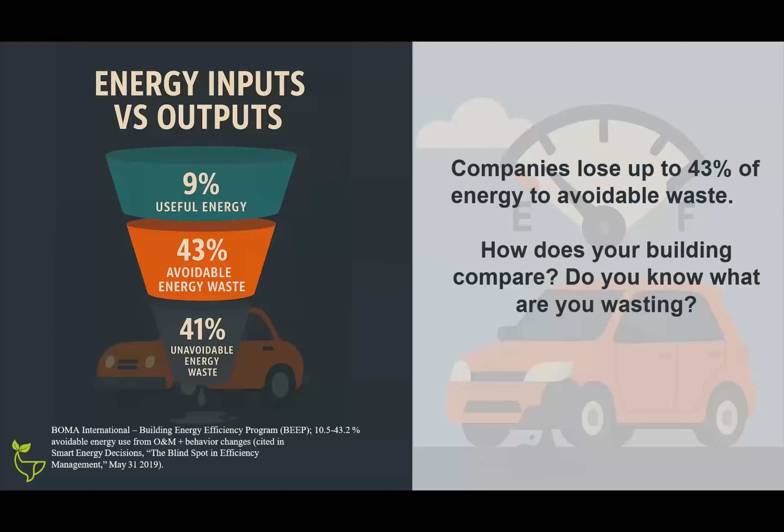So remember, we're out of gas. You find some kind soul that helps you get to a mechanic. Hopefully you're in good hands. But what does he say?

He says you need a bigger tank. Now that seems absurd, right? If you're leaking fuel, you probably have the leak, you need to address that. But the reality is a bigger tank could get you a little bit further down the road.

I knew a guy who would make regular trips to the valley and didn't want to stop for gas. So he literally had a 50-gallon tank added to his truck, so he never had to stop. I never knew what he did for the bathroom. I didn't want to know.

And this is kind of how some companies approach that idea. They're not looking at the leaks. Instead, they just try to add more generation, solar, wind, or upgrade their equipment. But if your tank's leaking, adding more fuel doesn't necessarily solve the problem, you're just leaking more. So even with a bigger tank, you're going to be disappointed in the long run.

This is what happens with some of those projects when they're not monitored. Solar projects since 2015 are delivering 7 to 13% less than financing models assumed. That equals a week of lost generation every single year.

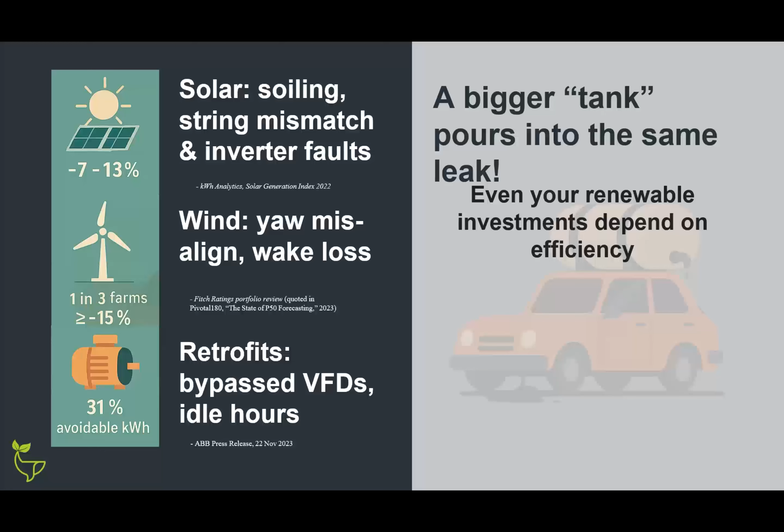So this is the principle driving our conversation today: energy efficiency is the first fuel, the only fuel that grows when you measure it. That's by Dr. Fatih Birol, executive director of the International Energy Agency. Their net zero pathway has 40% of the CO2 cuts just from efficiency.

That means no new hardware and no upgrades. If you want to read more about that, the QR code will take you to that net zero pathway. So if we look at it in comparison, the average cost to save a kilowatt is less than 3 cents. It's cheap, but people will gladly pay 4 to 6 cents for renewable energy.

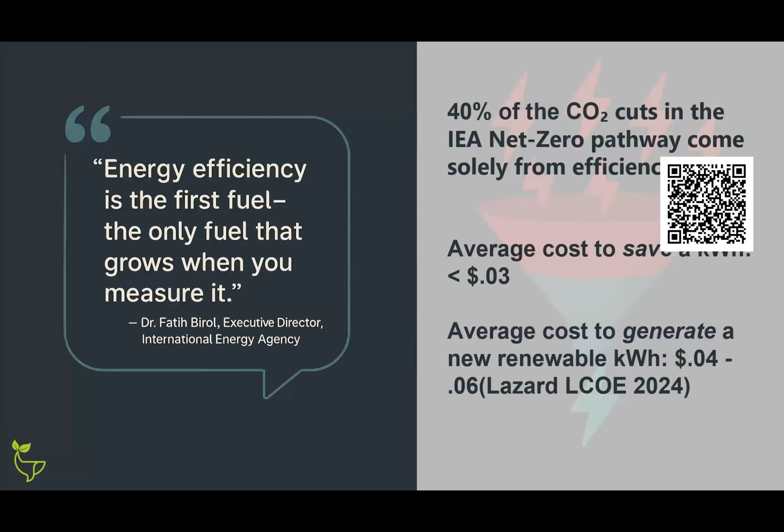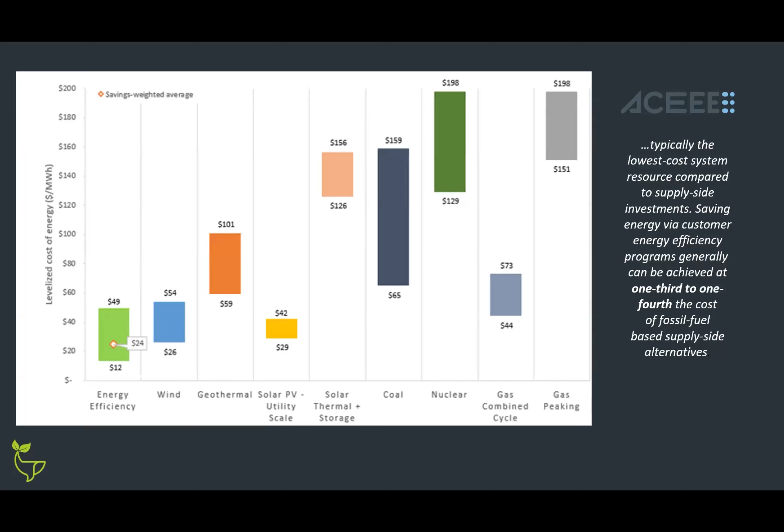So this is how it stacks up, energy efficiency side by side with those other systems. We can see energy efficiency is the cheapest, it's the fastest payback. So really we need to start thinking about it as the benchmark. All of these other things we can do are solid investments, but this is what every other investment should be measured against.

Every watt we rescue from the funnel is a watt we don't have to buy, burn, or finance. That's the first fuel we're talking about.

So we made the case: why should we produce more when we're wasting what we have? But sometimes in energy efficiency, they tackle it the complete opposite way. You may know somebody - we're going to save on energy, so we just don't use the resources that our operation needs because we're cutting back.

I found this comic because I thought it would resonate with the Texas audience, because we know any amount of time without AC is a nightmare. So we don't want to cut back. Energy efficiency is not about going without, okay? It's about using the energy we already pay for, but in a smarter way.

What got me on this thought was a county of Durham, a Wolsingham school in the UK, that had the idea of a Blue Nose Day. They sent a letter home to all the parents saying send your kids to school with sweaters, wool pants, mittens, and gloves, because we're not going to turn the boiler on - we want to reduce our carbon footprint and save energy.

But really, that's not the way to do it. We don't want to go without. We want the kids to put their sweaters away and enjoy. We want to raise the importance of being more sustainable, but in a responsible way. If you want to read that article, it's pretty funny - the QR code is right there.

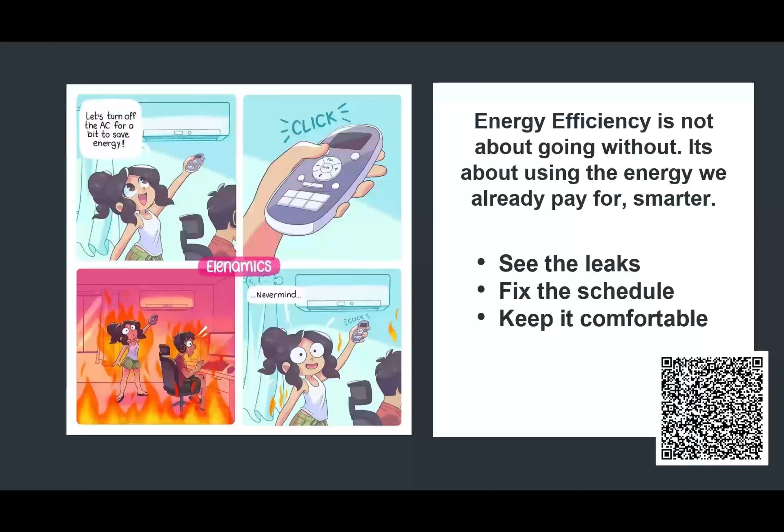So whenever an energy bill goes north, organizations can swing to those one or two extremes. But there's a smarter option right in the middle, and that's monitoring and optimization.

Here's a report by Siemens listing the top 10 energy saving options. If you notice, monitoring and targeting are at the very top. And it's not just that it's the top, it's the fastest - nothing else even comes close. Even the next one takes up to 12 months to get a return.

This is what they had to say about it: an effective monitoring system is typically the most important element of any energy management program and will deliver the fastest payback. So what does that look like in a facility?

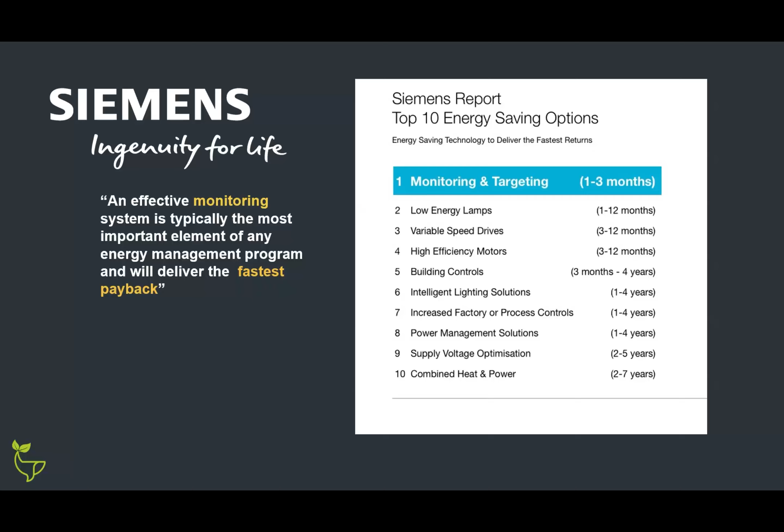Here we have a stylized version of a factory or facility, and we see all these little beacons. They represent certain equipment. The blue one we see there is compressed air - so you're losing $3,000 every year with just a 3 millimeter leak in a line.

The next one is a steam trap. If there's a little bit of moisture coming out there, you're looking at maybe $6,000 annually that you could be wasting. And this is not data that shows up on anything. You don't know it's there.

The blue is a cooling water pump. If there's any type of wear on the impeller or a failing seal, then the motor draws more current. But the key is even just a 10% rise in amperage will signal the maintenance team that there's an issue if you're monitoring it.

The yellow and the blue beacons represent like a forgotten HVAC system in a lab that nobody's using, or warehouse lights that are popping on at 2 a.m. and nobody knows that they're on. Each of these beacons has a unique energy signature, and when you have the baseline and you're monitoring them regularly, they jump out immediately.

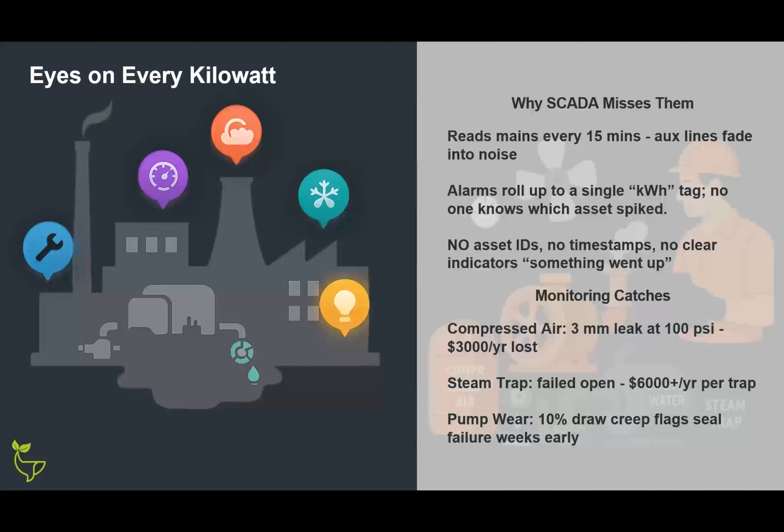A lot of people in the industry are thinking, well, we have a SCADA, so we see all this data, and we talked earlier about all of that historical data. But remember, SCADA is really, really good at controlling your processes, but it's not looking at energy efficiency and it's not looking for waste. So when we look at this dashboard here, this is what we're talking about with monitoring.

So if an asset isn't tagged, it doesn't exist in the data. SCADA doesn't see it, but that doesn't mean it doesn't exist on your electricity bill. You're still seeing those high costs, even though you're not line-iteming that item. It catches ghost loads because SCADA rolls that data up in 15-minute chunks.

We're talking about second by second being able to see that. So we're going to see those tiny little spikes, that base load creep, and we'll know immediately when something's not behaving according to the baseline. To make any changes with SCADA, it requires engineering hours, new code, so it's not easy to plug and play.

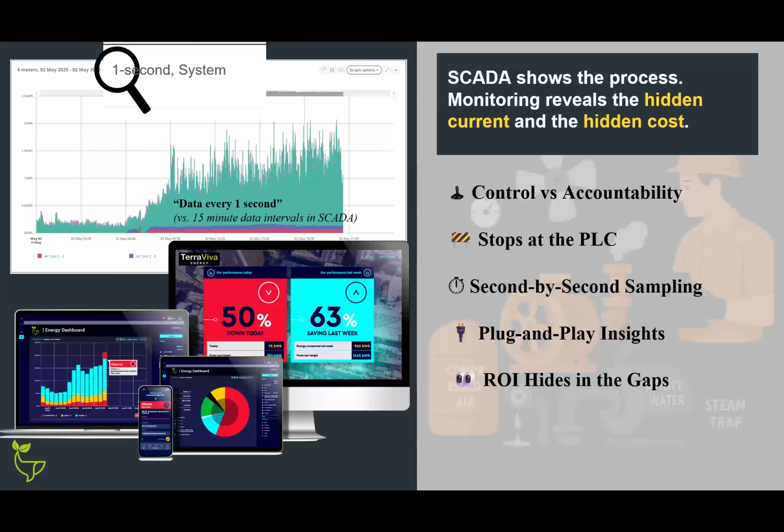So what does that look like? How do we achieve that? We have three different pillars. The first is the hardware: a mesh network of IoT sensors. We use CT clamps along with edge devices, and they communicate over a LoRa network without Wi-Fi, so you don't have to worry about that.

Then we have software, a cloud-native analytics engine, AI-driven anomaly detection, custom rule engine that delivers real-time alerts and user-friendly dashboards. And if you don't want to look at that data yourself, we have available a 24/7 virtual energy management team dedicated to monitoring those alerts, investigating deviations, and giving prescriptive recommendations. So it's really a closed loop system that measures energy, targets waste, and identifies the savings.

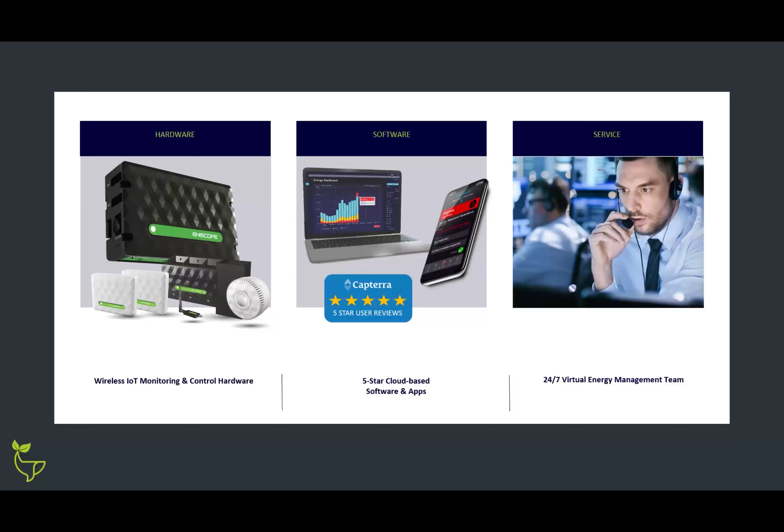Here's the architecture. It's an end-to-end feedback loop. We can see how the devices capture the temperature, the current, occupancy, the pulse count, the data, and it's all transmitted over the LoRa network, all transmitted to the hub, which is the Enscope right in the middle.

And I think the indoor range for that LoRa network is like 300 meters, so it's got quite an extended range. And it pushes data up as a default at a 1-minute interval.

To the cloud. And then the cloud is where the real-time analytics and anomaly detection take place, with custom rule engines and AI alerts that fire immediately when something drifts out of baseline. You can use our dashboard, which is very user-friendly, or if you have your own platform, pull that in via API, as well as send commands through that same API system. So this right here is the architecture that's delivering the cheapest kilowatt that you'll ever generate.

So how does this work in the real world? Here we have a laundry system in a hotel. You can see when we started monitoring, it wasn't even that long, just a couple of weeks. They noticed when they took all the assets and did an estimation of if they were all running full, how much energy consumption they should be having. But the actual consumption was extremely high compared to what it should have been. So that meant something was going on.

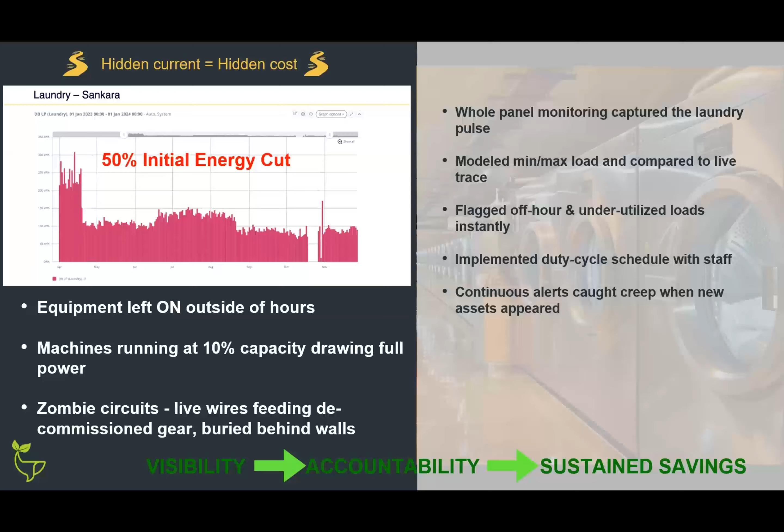We talked a little bit in the other case study about zombie loads, and that might be something you're not familiar with, but coming from the electrical side, that's something we saw all the time, just layers upon layers of old wiring in the walls. These are like zombies lurking behind every wall of most buildings. They're power drains that are completely invisible, and they come in the form of lighting ballasts left energized after an upgrade. That's like $30 to $50 a year.

Maybe HVAC controls that are disconnected but still powered, that could be $120 a year. Bypassed VFDs, decommissioned motors, they're all still wired. Idle panels and junction boxes that are still live, and then an empty server rack with switches, still drawing standby power, costing you $150 a year, but serving no useful purpose.

Individually, all these things may not seem so scary, but imagine these things across a building portfolio or a huge campus, and it adds up to thousands of dollars that you're not getting any use for, but you're paying that energy. The truth is, if you're not watching for every kilowatt, you'd never know that they're there.

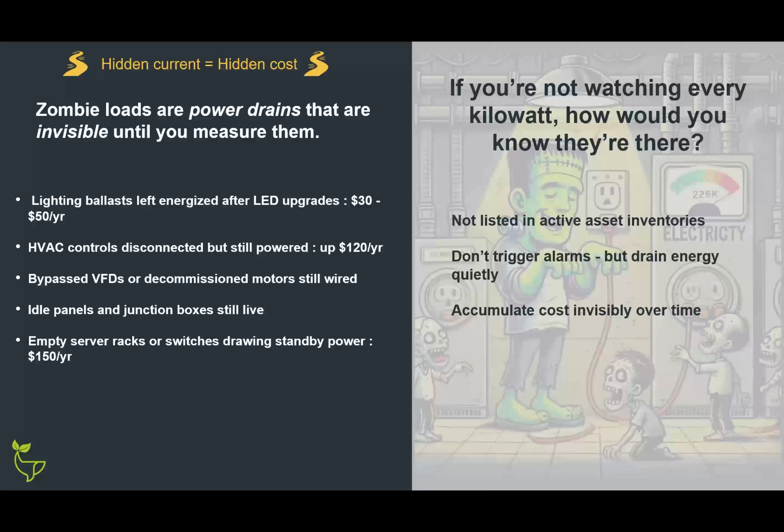Here we have a plant, a cement facility, and they had 150 motors that were all aging. I don't know if any of you know what that feels like, but you're depending on those motors for your operation, and you know that if one of them goes out, it's going to prevent your operation from functioning the way that it should. But you also don't want to replace it prematurely because you want to get the most value for that. But they had no visibility.

They had escalating energy bills, but no way to tie them to which motor because they had no sub-metering. So where they were at was they were considering a huge capital expense to just replace all the motors at one time because of the fear of critical failure. That's what had them worried.

So what we did was we installed CTs in different sections of those motors, and then they were able to rotate those to all the motors until they mapped all energy signatures of 150 motors. And then they found a few things.

They detected scheduling errors, also phase imbalance. They had motors that had 3 phases and only one phase was pulling the draw energy, and the other two were doing nothing. Well, that signifies a winding failure, a loose connection, or a VFD malfunction. So those are the ones that they knew they had to put attention to immediately.

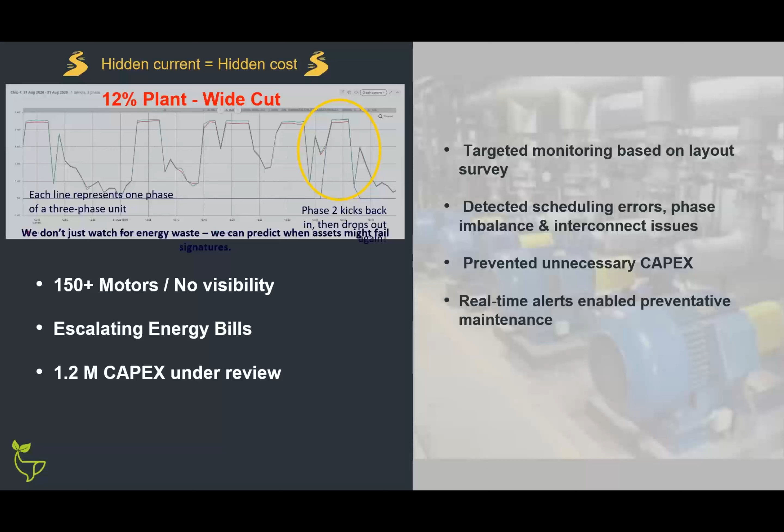Motors are the biggest power consumer in most industrial facilities, and they have the greatest potential for savings, but also the greatest potential for risk. So there's a lot of value to monitoring them to see not only when you have to replace them, but also when you don't have to replace them, that they can go a little bit longer.

Here we have a car crusher at a recycling plant. And it's interesting because if you look at each of those little blue plateaus, each of those represents a crush cycle. And every single one of them is pinned at max amperage because of course 100% does the job, right?

But once they turned monitoring on, it got them to consider the possibility: what happens if we dial that back to 65%? What's the outcome going to be? And so that's what they did. They could see the outcome was that they still had the same cycle, the same throughput. They got the exact same action that they needed, but they saved 40%.

Their energy draw went down 40%. Well, that's $75,000 that they saved annually. Can you imagine saving that just from making a simple change on a dial?

And imagine the lifespan of that equipment. You're running it at full speed and you tack it down, you're not going to have to replace those components for a lot longer because you're not running it at full speed. And so really that monitoring system was paid back in just 8 hours. I don't think there's many ROIs that you can get in just 8 hours, but monitoring compared to the other ones, it's such a small investment, but the payback is so high.

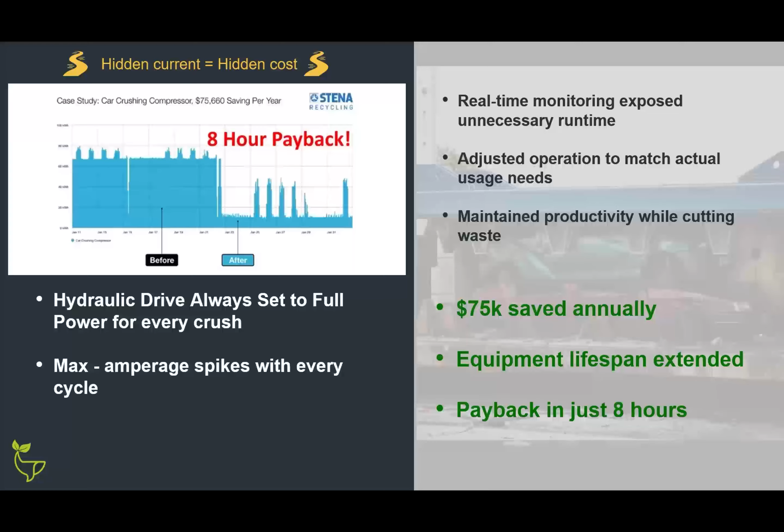So this is a metal foundry, and they operated 5 big, huge screw compressors that were running around the clock. But when they finally hooked up monitoring, they could see that the demand peaks never required more than 2 machines. So they had 3 huge compressors that were literally just hidden current and just costing them.

So once they were able to use the equipment accurately with their real needs, and then they also were able to find the leaks and tackle those, they had a 42.5% compressor energy cut in 5 months. They saved $67,000 and their ROI was returned in less than 1 year. And they had a 50% CO2 drop.

And what's great is that phase 2 was greenlit because they had such great success just monitoring those compressors, that now it's underway. They've added 4 more Enscopes. They're monitoring the lighting and the ovens and all of their motors because it's addictive. Once you can see the kilowatts, you want to see them all because what else can they show me?

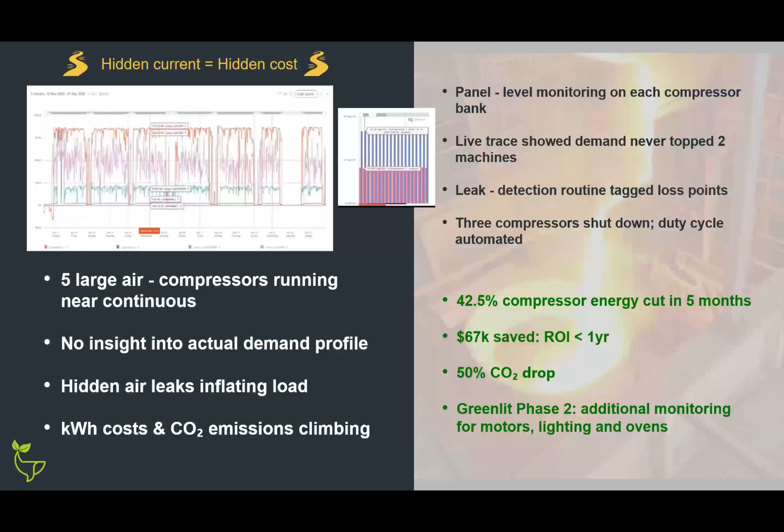So if we think about sustainability goals, whatever it is, we all have them for our organization. They're really a journey, okay? And we have to get there just like we go to any destination with a roadmap. But the truth is that the only way you can plot a destination is if you know where you're starting from. So like a GPS that doesn't have any kind of location signal, that's where a lot of people are operating. They're trying to get to these goals, but they actually have no idea where they are currently.

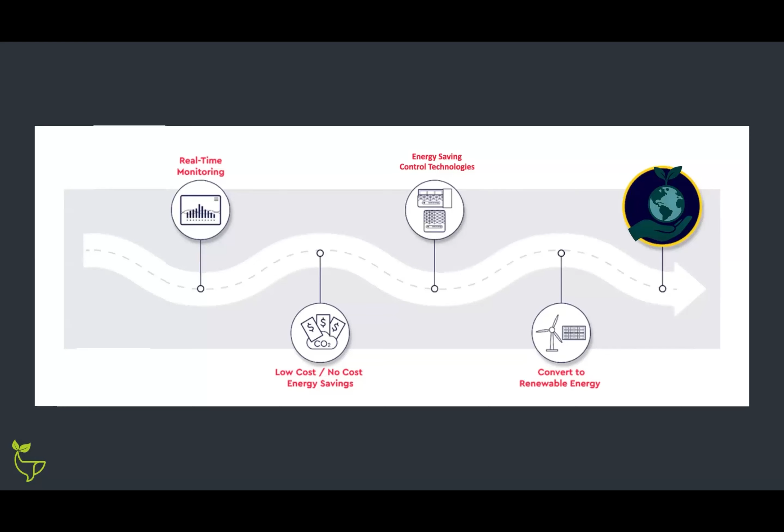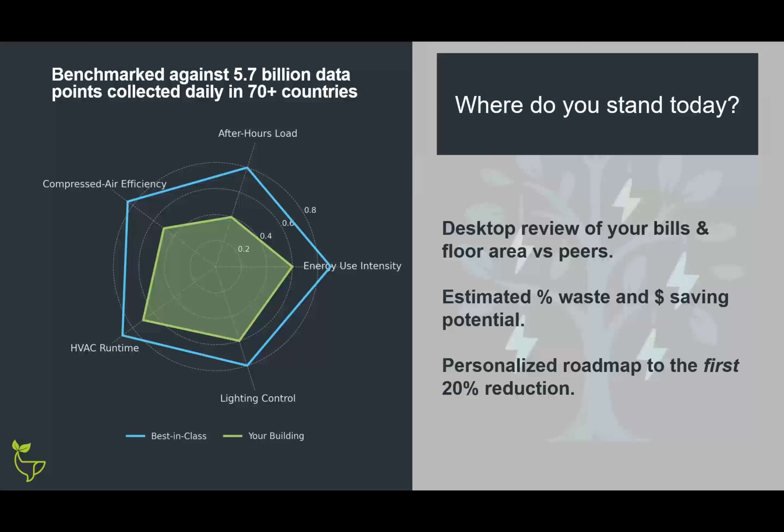So generally, TerraViva monitors 5.7 billion data points collected in over 70 countries. We can take a review of your bills and your floor area based on the systems you have, and get a really good benchmark of where you are, how much waste, a projected amount of waste, and your potential savings. From that point, we can build a roadmap to get you to your first 20% of savings. I'd love to talk to everybody about your specific pain points or concerns. Here's my contact information if you'd like to start that conversation.

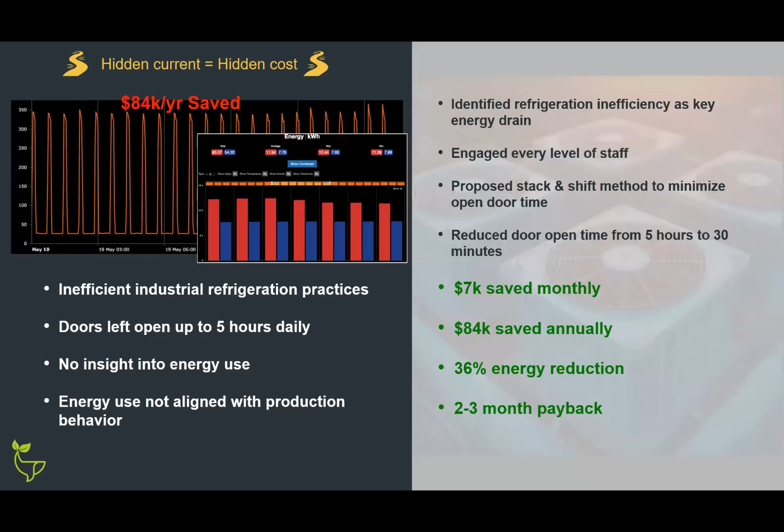Perfect. Okay, we have time for a few questions. Right off the front.

Eva, when we've done these kinds of surveys, one of the things we find is that measurements are missing on much of the equipment. So how do you address that issue?

Well, when you say survey, that makes me think of a snapshot of the energy at that time, like an audit. Is that what you're talking about? Well, an audit to justify putting in a real-time monitoring system. The data doesn't take much. You can do a proof of concept on one piece of equipment you want to see, and then you can see right away what that current is drawing. So my answer is that it's not a snapshot - you're seeing it continuously, so you can see in real time what the changes would do.

But what I was saying is the actual device lacks measurements of the current or of anything else. This is a partner of mine, and he might be able to answer. Oh, you have the mic - I want the people online to hear.

Hi, my name is Azar, and I appreciate your question. I think you are absolutely right. A few years back, the technology was new. These monitoring systems have been out there for a few years, and the issue around missing data and accuracy of data has been a problem over time. But what we've seen over the past few years is that the quality of equipment in terms of technology advancements is improving every day. Five or seven years ago, we used to see this as a significant problem - system after system you'd see data points missing and accuracy of data questionable. But where we're sitting right now, it has improved a lot. It's a journey - we're not 100% there yet, but the quality of data management, data readings, and measurements keeps improving.